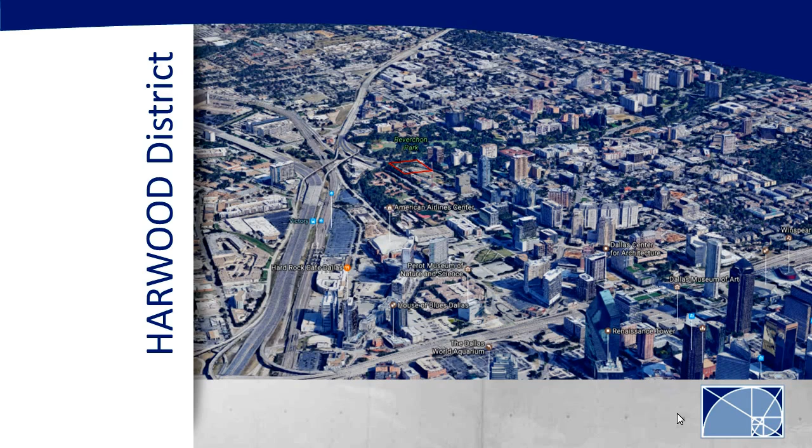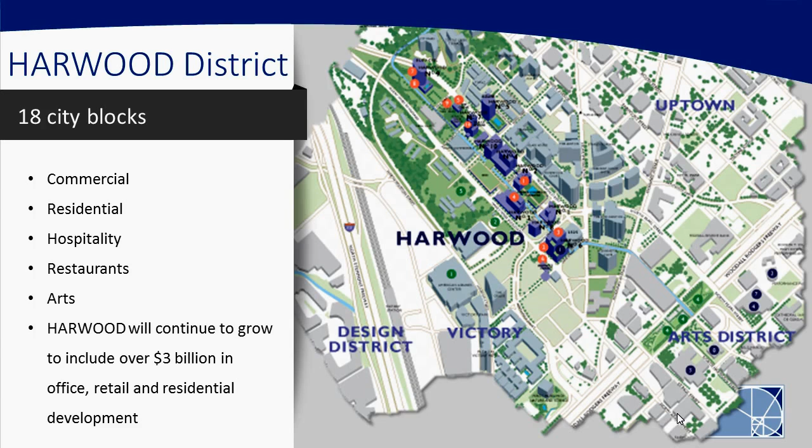Like I said earlier, this is an 18-city block district. They have commercial properties, residential properties, hospitality, restaurants, and they have a very important place left for the arts. Gabriel Barbier-Mueller has a samurai art collection, and throughout the district, every one of the developments has samurai art showcased at the lobby. Harwood is also expecting to continue to grow and develop fully the district to include over $3 billion of additional development in this area.

They're keeping really busy right now, and one of their other projects that we're working on is this 8th development, the Rolex building. This building was designed by Kengo Kuma of Japan. He's a very famous architect designing some of the stadiums for the next Olympics. The architect of record is HDF. It's Harwood's own architectural firm. The landscape design was done by Sadafumi Uchiyama, who is the curator of the Japanese Garden in Portland.

And this building just topped out last December. We're still working on it. It's taking a little while, as you can imagine, to install the glass on this building. The interesting thing about this building is that every floor plate is rotated from the previous one, so there will be large terraces that will be landscaped at every floor.

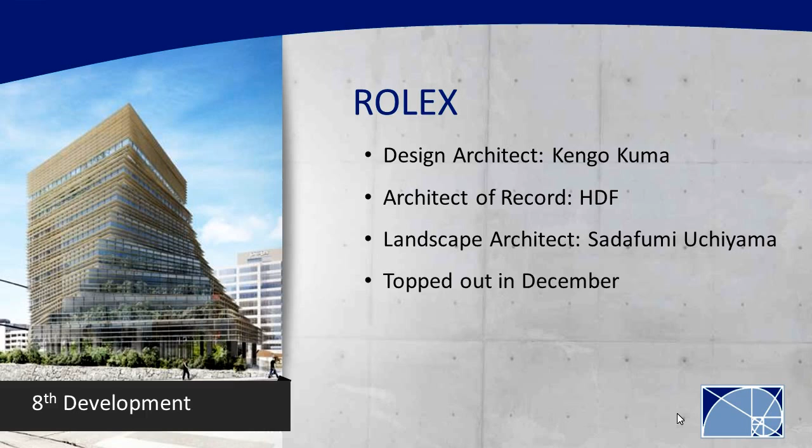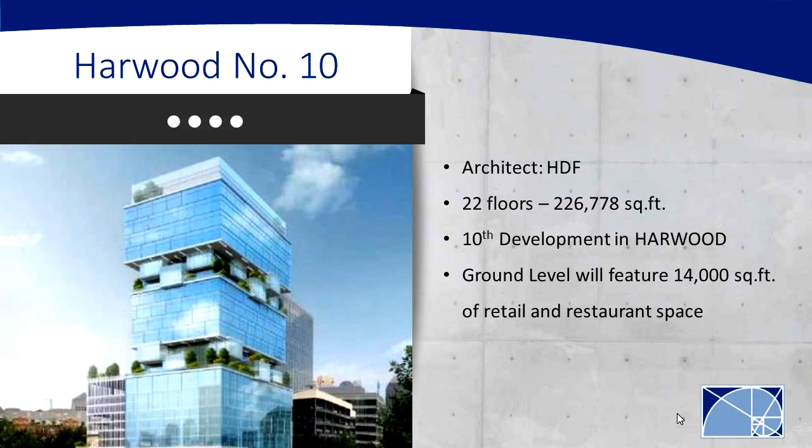Also going on at the same time is Harwood number 10. This one was designed completely by Harwood's own in-house architect, HDF. It will be 22 floors, 226,000 square feet. It is the 10th development. This one just started construction. They're drilling piers and pouring grade beams right now. The ground level will have 14,000 square feet of retail and restaurant space that they are lining up against an existing building to create an alleyway, kind of like something you would see in Europe.

Now let's jump on to Bleu Ciel. Bleu Ciel was designed by Jean-Michel Wilmotte of Wilmotte et Associés in Paris. The record architect on the project is HDF. The landscape design was also by Sadafumi Uchiyama. Structural, obviously, is by L.A. Fuess Partners. The MEP services, that's mechanical, electrical, and plumbing, was Blum Consulting Engineers. Civil engineering was provided by Halff Associates, and on this project we also had a wind tunnel consultant called CPP.

The construction team on this project is Hunt Construction, who is the general contractor. The construction management was provided by HTMS, which is Harwood's own in-house construction management. The concrete was delivered by Capform, and the structural steel was provided by Red Steel. There are many more contractors, including the temporary retention contractor, but I'm just going to talk here about the ones that we actually dealt with a lot.

The project is 33 stories tall, that's 390 feet above ground, but there's an additional 52 feet below ground. That's 570,000 square feet above ground and 202,000 square feet below ground. So if you consider that you have 33 stories above ground and 5 stories below ground, you can see that the basement is significantly larger than the tower footprint.

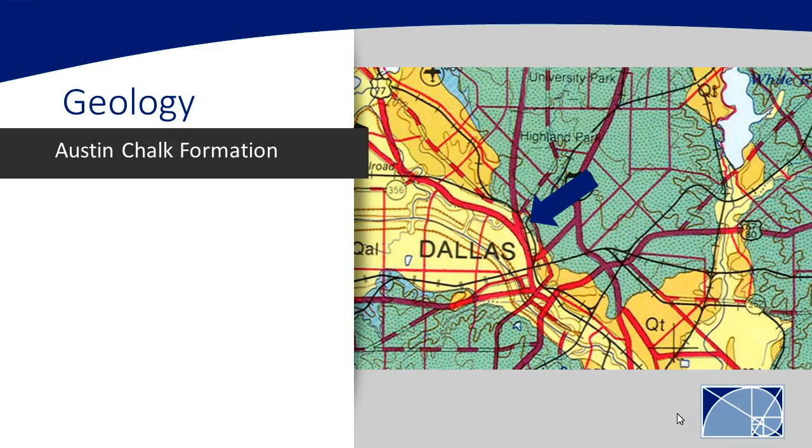So let's start with what's under the tower. This is a geological map of Dallas, and the blue arrow is pointing to where the project is. In this area, whether you're on one side of the highway or the other, it makes a tremendous amount of difference. In this case, we're in the Austin Chalk Formation, which is basically a few feet of clay, then about 70 feet of limestone, and below that is shale.

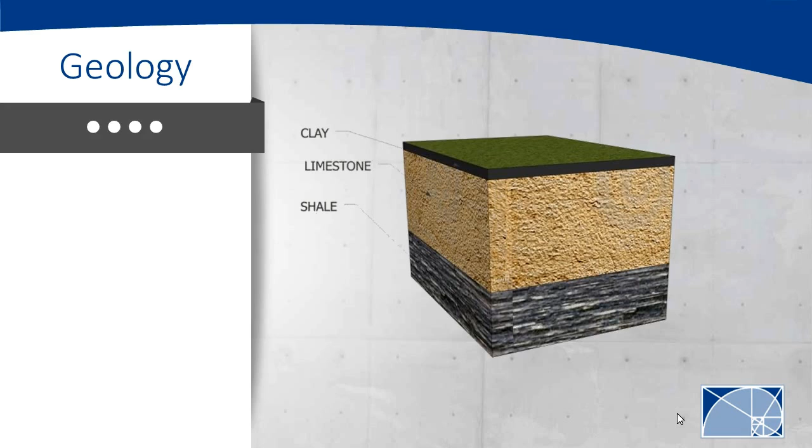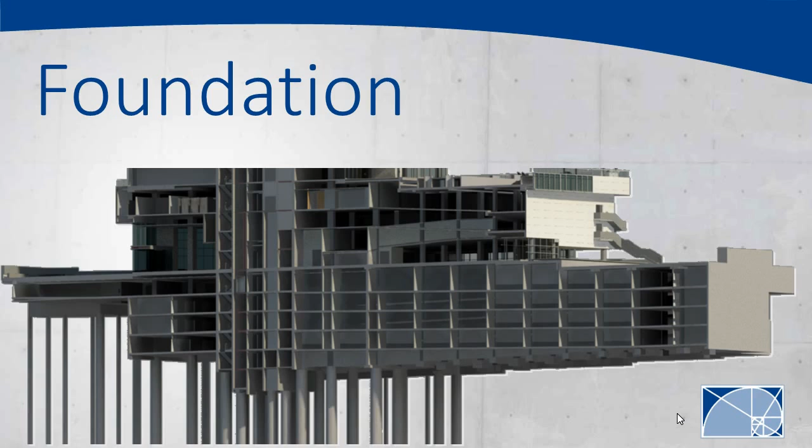The reason it's relevant is that our foundation starts 52 feet below ground, but we also have the elevator pit, and because it's a tall building, the elevator pit is pretty deep. So the lowest foundation starts about 64 feet below ground. At that point, we've pretty much exhausted all of the good limestone, so we had to get in touch with the geotechnical engineer to figure out how to adjust the values to take into account both the limestone and the shale that we'd be penetrating with those piers.

So I'm proposing to go up the building to look at the design, and we're going to start with the lateral resisting system. This concrete shear wall core is basically what's keeping the building in place. It's about 52 foot long and 30 some odd foot wide.

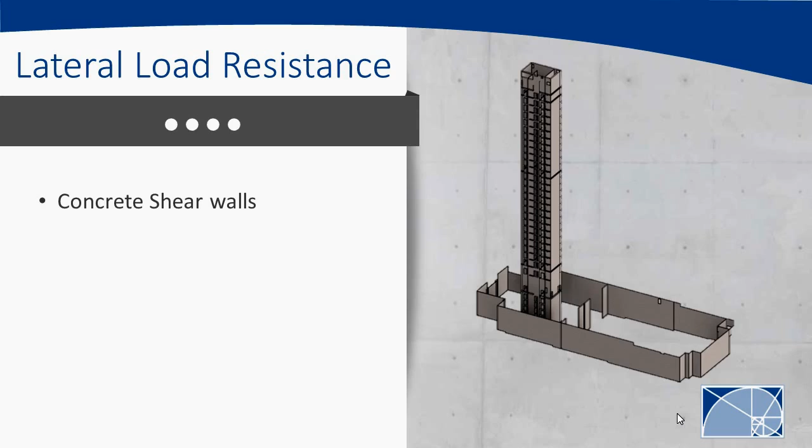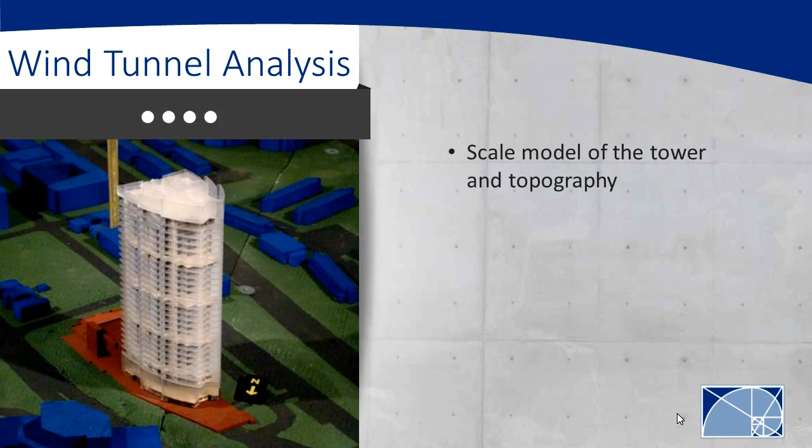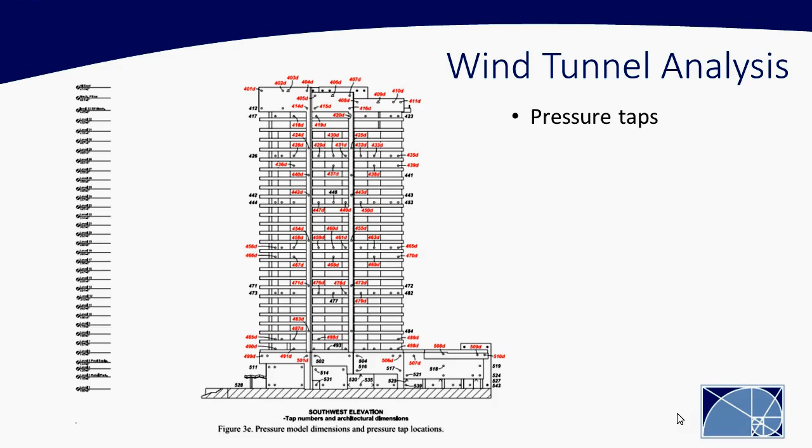To design it, we created a preliminary model and sent that information to a wind tunnel consultant. We told them the stiffness of the building, and with that they create a model. We also sent them a 3D model of the building so they could create the skin around it. They create a scale model of the tower and drill little holes all over the facade to put pressure taps on the building. I believe there's more than 300 pressure taps on the model measuring data points of pressure.

Here's a view of the table on which they mount the building. You can see the building is clear in this picture, but they also build all the surrounding buildings in the area to get a good idea of how the wind flow is affected by the built environment around it. That table represents a 1,600 foot radius around the tower. You can also see little boxes in the tunnel, which are just there to create turbulence in the flow to represent the city around it.

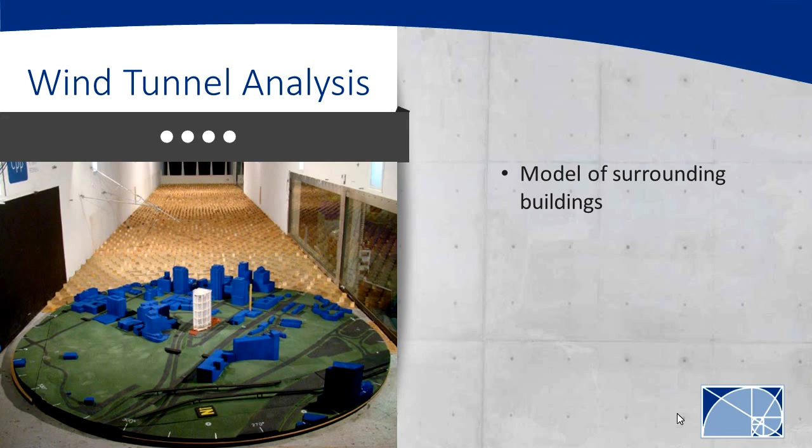Now let's talk about the basement a little bit. This basement is very, very large—so large that most residents will have a 2 to 4 car garage. Here's a picture of the basement excavation. The picture doesn't do it justice, but it's extremely deep and extremely long. You see that tower in the back, it's Frost Tower. You could actually take that tower, turn it on its side, and fit it into that excavation.

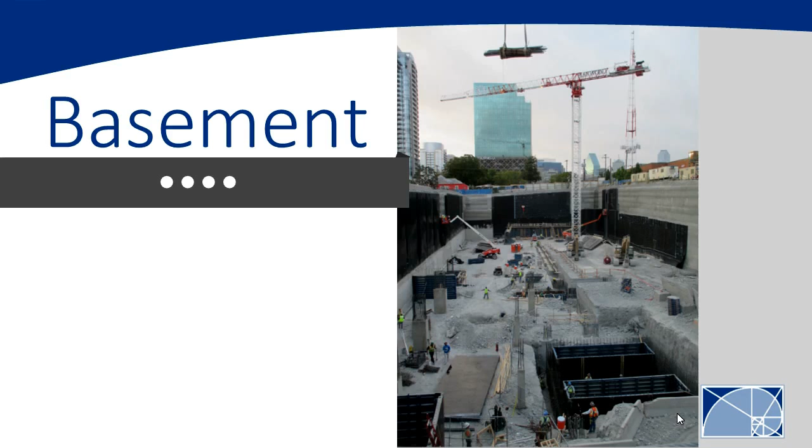The basement system: we had a temporary retention system because the excavation was so deep, and we were right next to the entrance to the tollway, so a slope cut was not an option—it had to be a temporary retention system. So what the contractor does is excavate 5 feet of dirt, put in soil nails, excavate another 5 feet, put soil nails on a regular spacing, and keep going like that. On top of that they shotcrete the face so the contractor has a flat surface to work on.

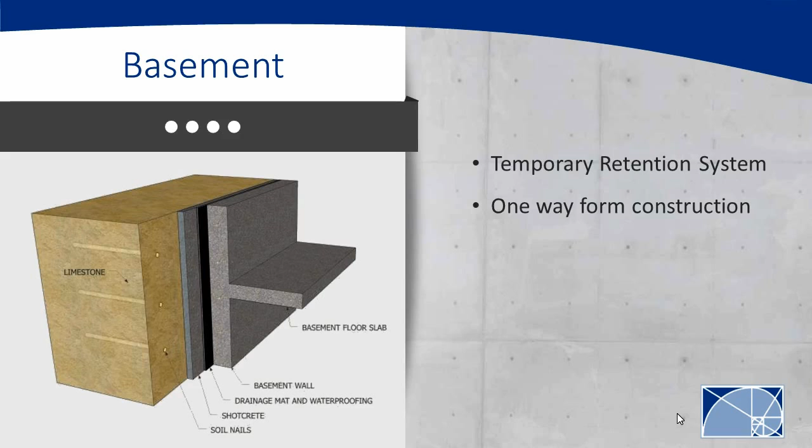The next layer is basically a drainage mat that gathers all the water infiltration at the top and directs it to the bottom. We then place a waterproofing membrane to prevent water infiltration through the concrete inside the basement, and then we pour the basement walls. This is what it looks like at the base: water is gathered inside the drainage mat and gets to the bottom. We have sleeves at regular intervals around the perimeter to move the water from the back of the wall to the perimeter drain system under the slab at the base.

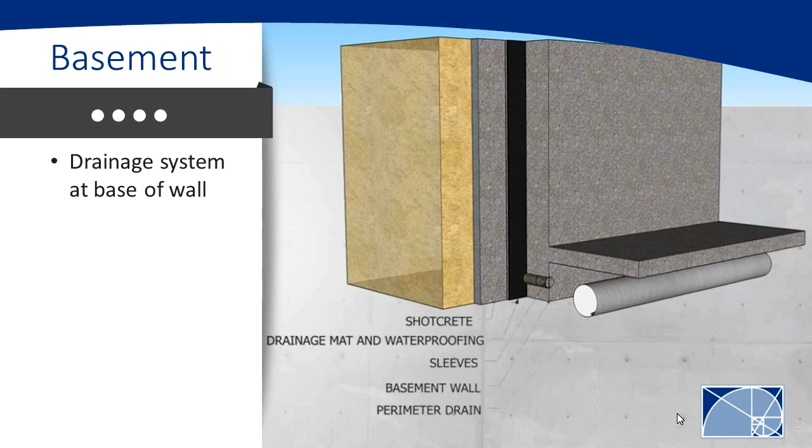So let's move up to the ground floor, which is just packed with amenities for the residents. There's a juice bar, a bike shop, and a gourmet grocery market that will bring groceries directly to the residents' units. There's also a 24/7 concierge service and valet parking for residents at the front entrance.

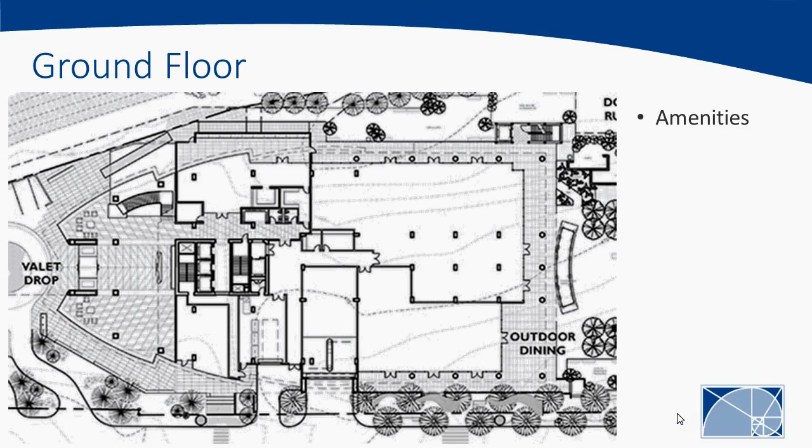On the space that is not right under the tower, but the continuation of the basement, it will be basically a huge plaza with up to 6 feet of dirt on top. It will be fully landscaped. There will be another water feature, and it's also designed for possible future retail on top of it, probably a restaurant.

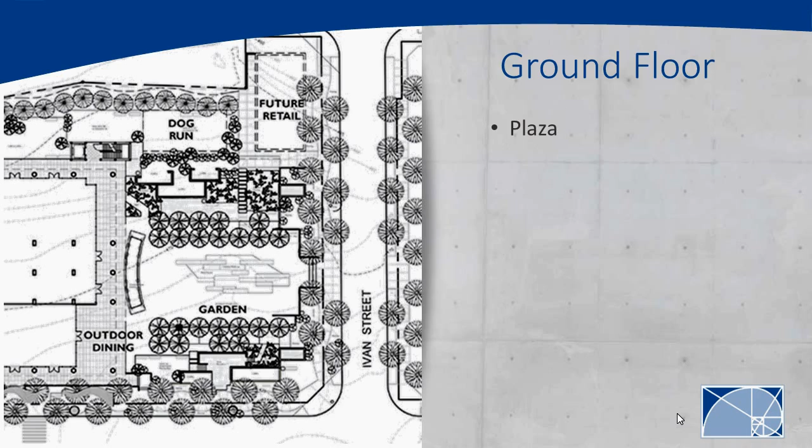But now there's also another aspect to this ground floor that is not quite as fun as all those amenities. This tower, 390 feet, is basically cantilevering off from this floor. So all that wind load that is accumulated in the tower gets down at this level to be redistributed into the basement walls. This is called the backstay effect.

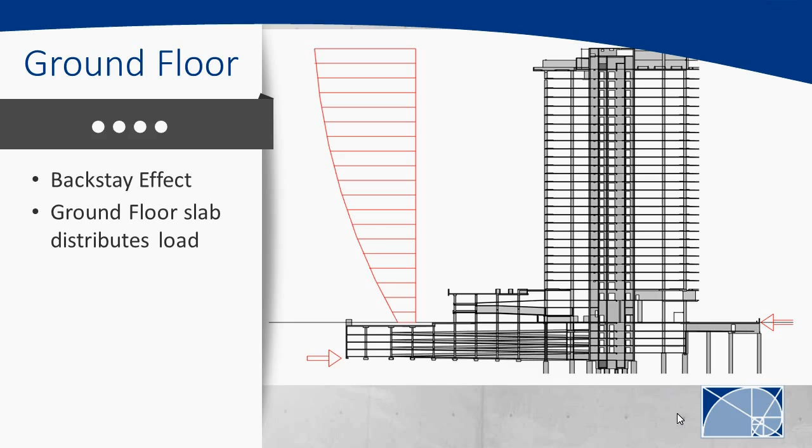This is a tremendous amount of load that's trying to get to that ground floor slab. The ground floor slab is 18 inches thick in order to be able to take that load and redistribute it to the basement wall.

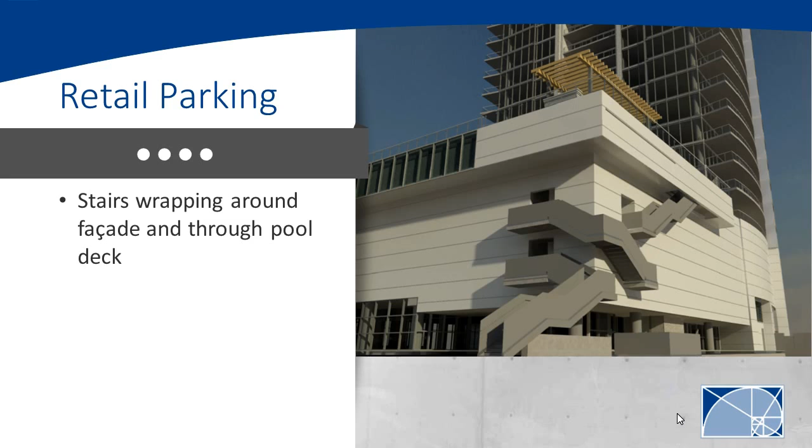Let's keep going up. So now we are going inside the retail parking. As the name indicates, this is for the retail tenant. One interesting feature of this retail parking is this stair that basically wraps and weaves around the building. So we had to cantilever our parking slab past the face of the building to go pick up that stair. And you can also see that the last run actually pierces through the 6th floor pool deck.

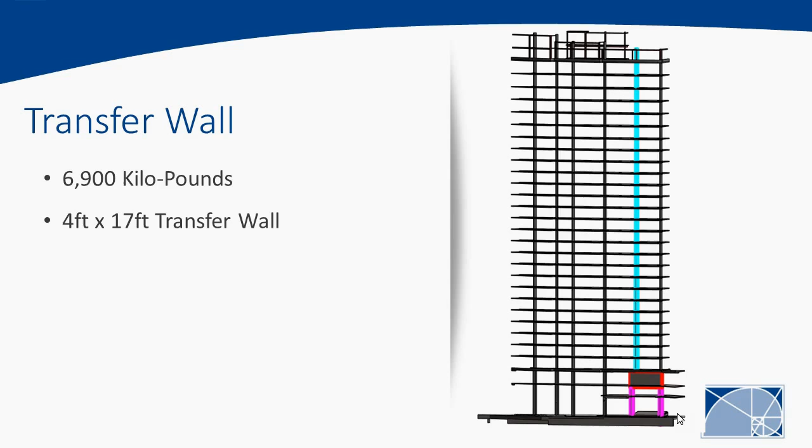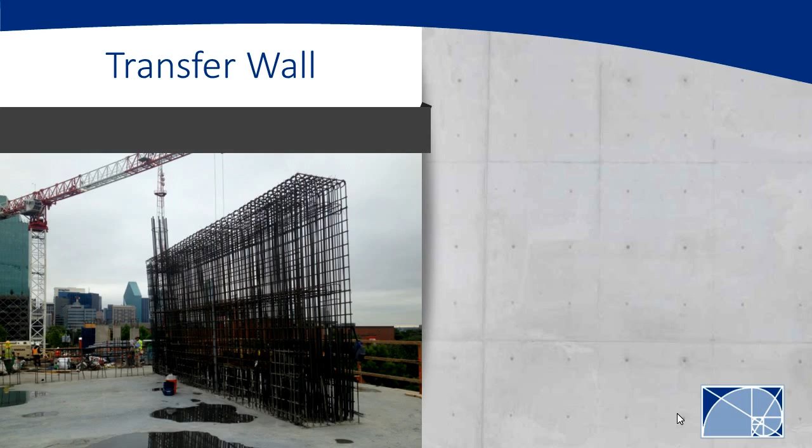So after a few preliminary calculations, we figured that our transfer girder was pretty much going to be a transfer wall. That's a 4 foot thick by 17 foot tall transfer wall. The problem with a 4 foot thick by 17 foot tall transfer wall is that it does not really behave as a beam anymore. It doesn't bend, it's just pure shear, and so we have to use special techniques called strut and tie modeling to come up with a design like that. As you can see, it's a little bit congested. There's a lot of steel in there.

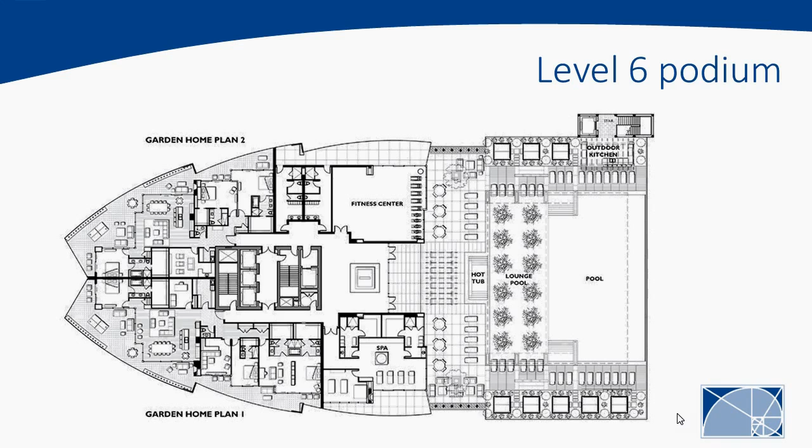For all the residents, you also have a fitness center. You have a spa that is exclusively for the residents, and you have a pool deck. It's a pretty nice pool deck. You have a hot tub. You have 2 junior Olympic swimming pools. That first one is actually probably not a swimming pool, it's only a few feet deep, but it has those palm trees in it, lounge chairs, and it spills over an infinity edge into that other swimming pool. There are cabanas all around the swimming pool on dirt. And it's a very nice feature for the residents.

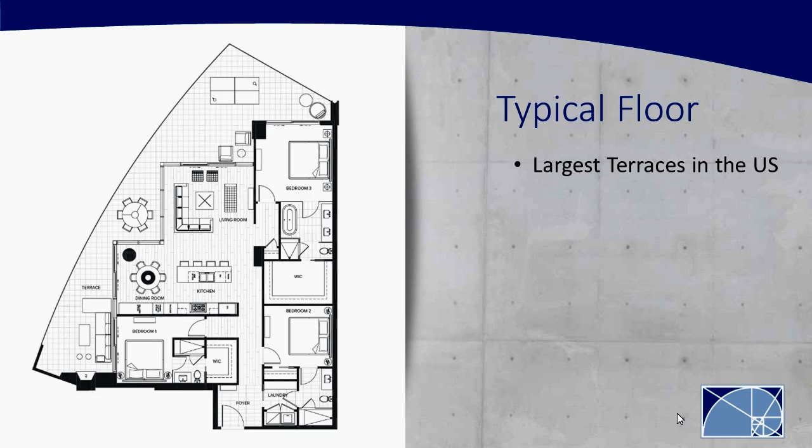But anyway, this is a 15-foot cantilever from the column to the edge of the balcony. The reason that's relevant is that we have a two-way post-tensioned flat plate system. The way this is supposed to work is you have uniform post-tensioning tendons in one direction and banded tendons in the other direction. And what that does is basically allow us to keep the slab very thin.

It's a flat formwork. The mechanical can just run unobstructed. There's no beams. It's a very efficient system.

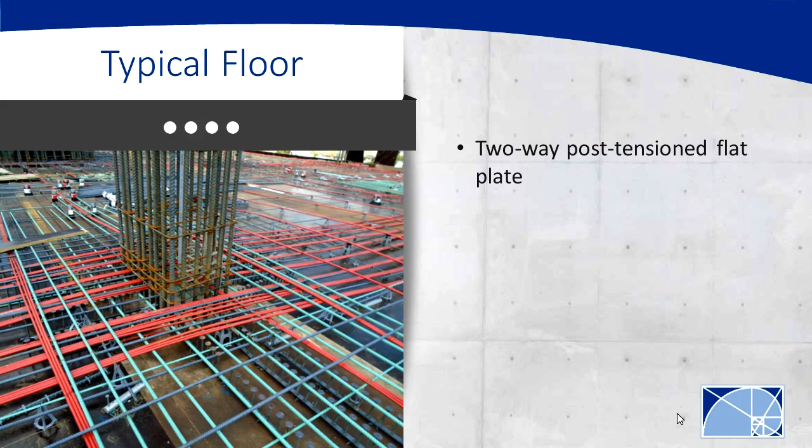But in our case, we had to go pick up those corners somehow. So at those corners, the post-tensioning is really running in 3 directions. You can see the banded tendons here, that's where you have the big congestion going basically transversely diagonal.

We are going uniform in 2 directions, and banded in 2 directions. To make it worse, this is also where the terrace is happening, so the slab steps. Every elevation of this tendon had to be figured out before, in order to avoid clashes in the field. It was quite a tricky situation.

I'll stay here for a minute. The typical floor is repeated 23 times. On the construction side, they actually put one of these floors every 5 days, so it's a pretty fast pace. The reason they can do that is the repetition, and like I said, the flat plate is a very efficient system.

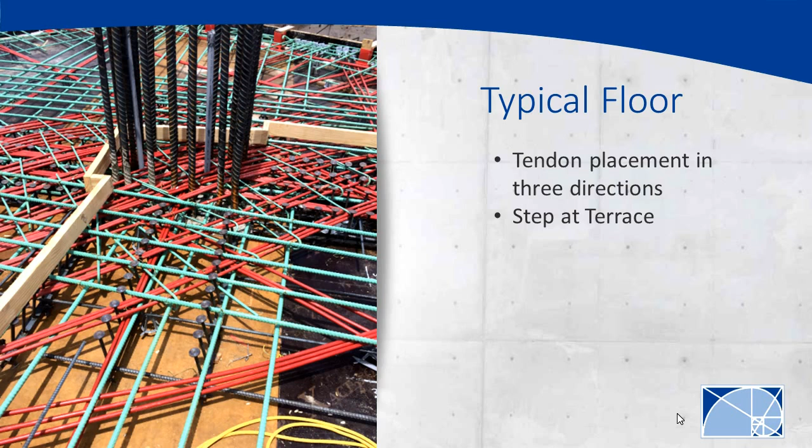They can just move the forms out and put them back on the next floor and start again, so it goes extremely fast. They don't have to actually form everything every floor, it's just repetition, and it's extremely quick. So that floor repeats 26 times, something like that, and then you get to the penthouse floors.

The penthouse floors are packed with amenities for the lucky owners. It's basically a 2-floor system. They have elevators taking them from the 32nd to the 33rd floor. They have an entertainment area on the 33rd floor, which is also the roof.

This will also be landscaped by Sadafumi Uchiyama, the curator of the Japanese garden. And it will not be complete without a pool. In this case, they actually had two pools, one for each unit.

To make it a little more interesting, they decided to cantilever those pools at the edge of the building. This is 32 floors of nothing below those pools, and it would be nice if it was just a pool, but it would be better if it was glass.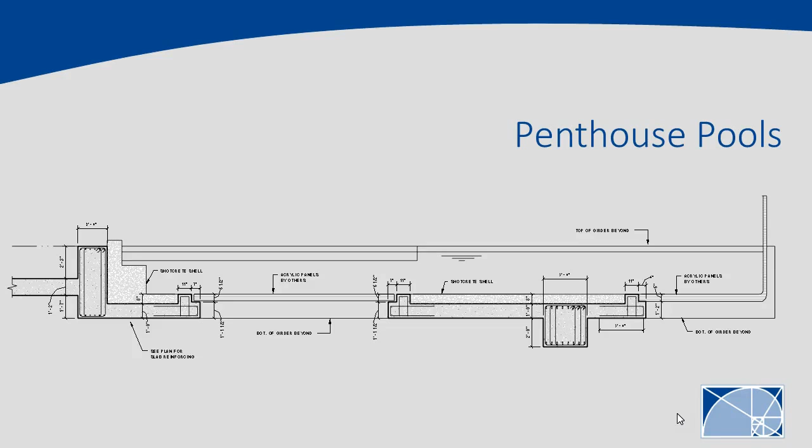There's a gunite shell that is spread over our structure, and you can see the structure is pretty beefy, but it's still very scary. There's a cross-section going the other direction. Same thing, you can see the glass, the acrylic panel here. There will be, of course, handrails on the side to prevent falls.

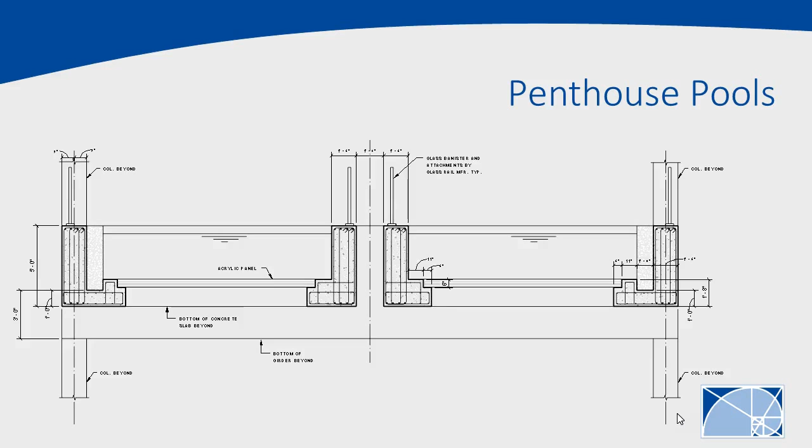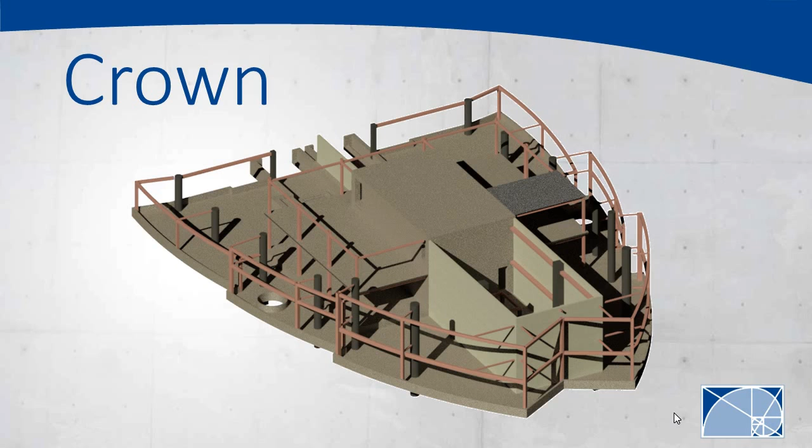This 25-foot tall screen wall also needs some backup steel there, and there's additional mechanical going into the space above. Those are the roofed areas, which are the party spaces for the homeowners.

Here's the real construction update. This building just topped out last week on Tuesday. Like I said, they were pouring a floor a week, so it went really fast once they started hitting the typical floors.

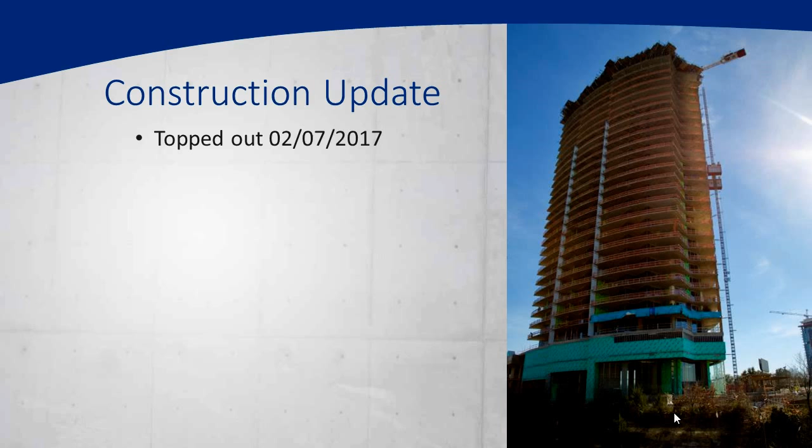I think they're still working on the glazing. I believe the first tenants are expected in July of this year, but they will keep building the interiors for at least another few months until they can finish this stuff. All right, do you guys have any questions?